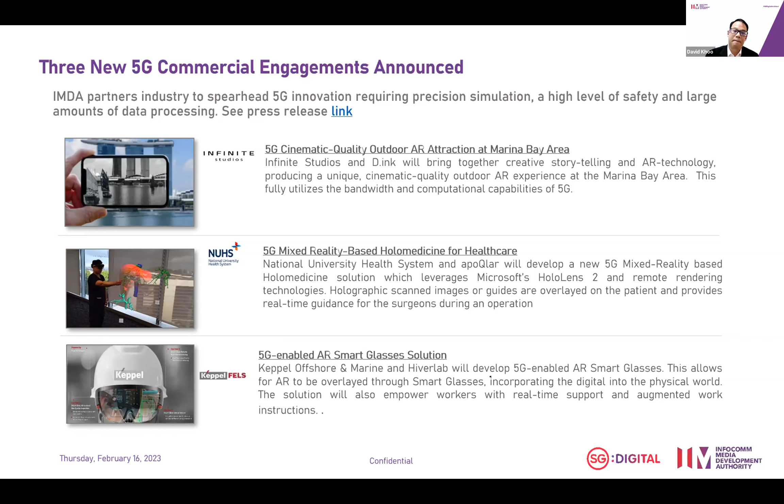So what is in it for manufacturing? As I mentioned, we've got several manufacturing engagements. It's just that it's not formally announced right now, so I'll have to refrain from mentioning who the companies are. But broadly, we see 5 different use cases within the manufacturing space which are looking at transforming how they do work.

My colleagues will talk about this later, but having collaborative robots relying on 5G, having your AMRs moving on the factory shop floor, we see that as a very common use case in the manufacturing space.

Second one, real-time monitoring, using cameras and obviously your IoT sensors as well, being able to provide true visibility for your manufacturing shop floor is also another key use case.

If you put those two together, collaborative robots and real-time monitoring, what's really changed in the manufacturing space is the fact that the shop floor now is completely dynamic. When I say that, I mean the shop floor isn't fixed to one station doing one thing. It can be repositioned or reconfigured dynamically to allow different products to be manufactured within that space.

And when you're looking at reconfiguring the shop floor, you can't have cables being pulled or laid for that purpose. 5G, being a wireless medium, provides them the flexibility of having that dynamic shop floor.

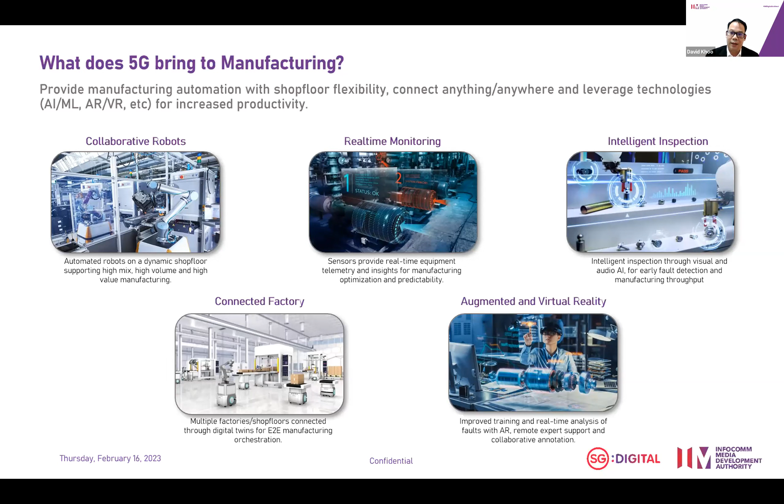As Terence mentioned, to get that ecosystem going, IMDA can't do this alone, and we actually work with several associations, several partners to make that happen. Obviously, webinars like this are very helpful to get the message out there and get awareness for us. But in addition to that, technical workshops are also critical.

So I mentioned we've got these open live test beds. One of those live test beds IMDA operates is what we call Pixel Labs, which is one of our AR VR labs. So if there are companies out there looking at trialing or understanding how 5G can transform their business, we would encourage them to make use of these open live test beds.

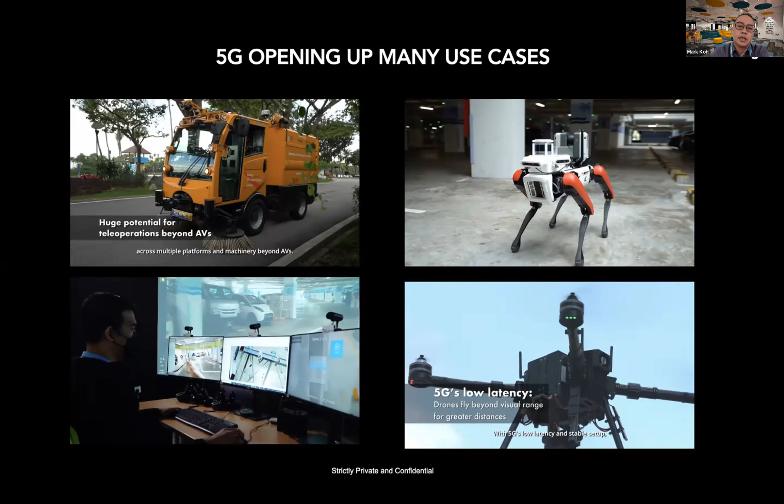Before I get there, I just want to quickly highlight that 5G has been talked about quite a bit. A lot of folks have seen the possibilities, whether it's some form of augmented reality use case, autonomous vehicles, AGVs, robotics, or even drones. This excites a lot of customers, but as we engage our customers, we see there are actually two major challenges that many of them face when they want to begin their 5G journey, which we can bucket into two big broad areas.

The first one is business case. I did see a couple of questions popping up about whether there's any real use case. One big thing that tends to come up is what's the return on investment for something like this? Why proceed with 5G? What can I do with 5G tends to be a very common topic, because a lot of times there are a lot of nuances.

People hear about the increased bandwidth, the reduced latency, the whole notion about SLA being enabled with this new concept called network slicing, edge computing. So in many cases, a lot of customers are trying to figure out how that fits in, how that benefits them, and whether it's sufficiently enticing to actually dive in and invest in this.

The other big area that tends to come up is how do I manage this? Doing a small trial is fantastic, where you build a full stack application like a drone, but how do I manage this at scale once I put this into production? How do I make sure it operates from an end-to-end perspective? That's also the other big question always looming in our customers' minds.

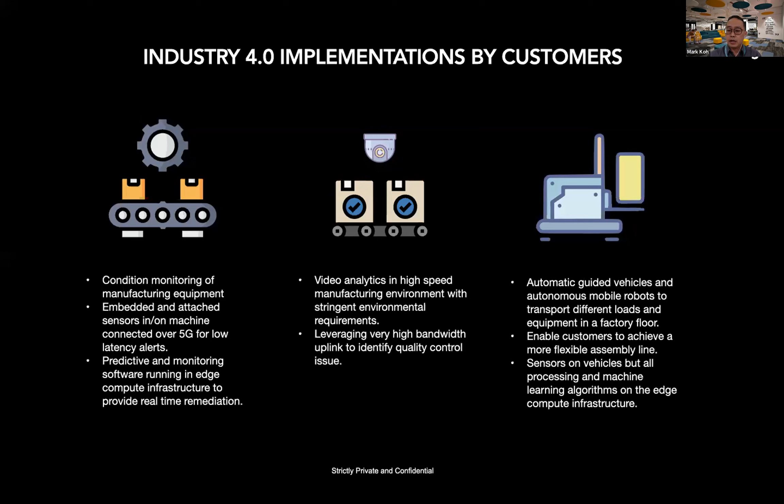Lastly, this is going to be my last slide. I'm just going to very quickly walk through three different use cases that our customers are actually looking at. These are in paid trials.

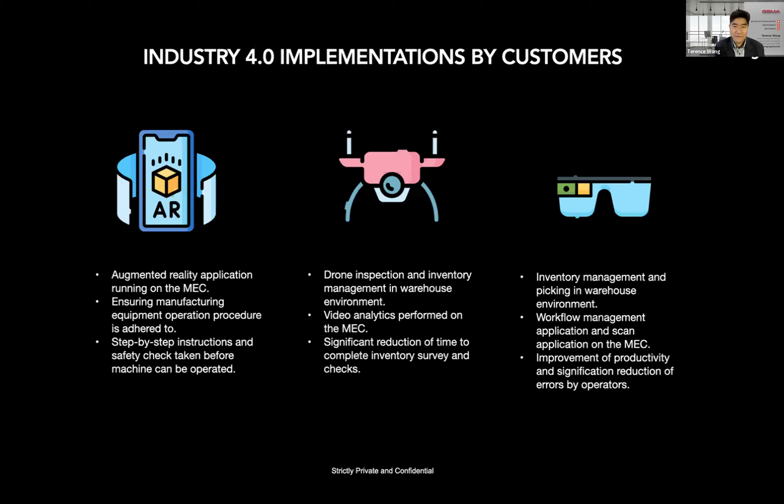Yes, thanks Mark. I think it's very good to see Singtel as an operator already transforming yourselves to bring new capability to support industry for digital transformation. I think it's really encouraging to all our operator members who are also looking at supporting this very good opportunity. So Mark, there are a few questions — please check the Q&A boxes. A lot of questions are already answered by David, but you can also take a look if you want to supplement any information. Of course there are also some questions directed to you.

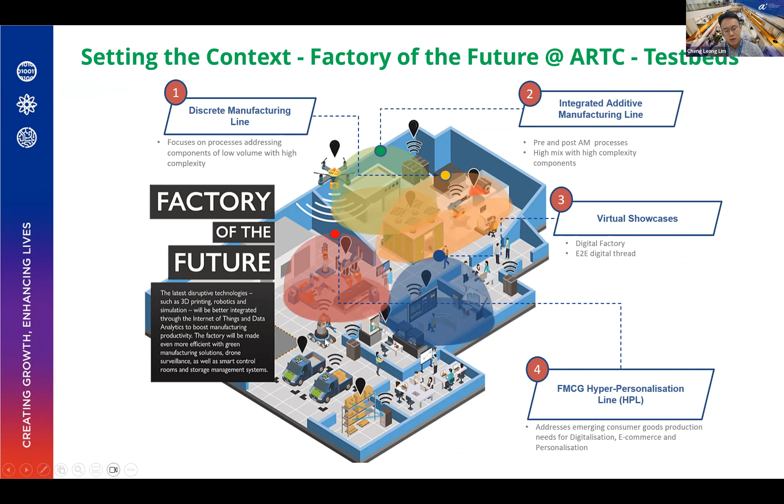And this is where we see connectivity becomes the foundation of the factory of the future. Connectivity must first support an information-centric network, meaning that the data being acquired can be distributed to gain meaningful production insights as well as control.

But how can connectivity today, as well as in the future, ensure seamlessness in the shift within these industrial processes? How can these building blocks be easily integratable, reconfigured, and redeployed within a factory line itself, overall at a much lower cost?

Practicing and realizing the promise of enhanced connectivity like 5G is really easier said than done. In ARTC, we have multiple 5G test beds, and we learned that 5G is really not a plug-and-play solution. There should be system design change and system reconfiguration to really take advantage of 5G, for example the choice of streaming protocols, or industrial applications in terms of camera settings. Having a dedicated space for industrial players to first trial, to gain implementation know-how as well as confidence in the technology, is very important.

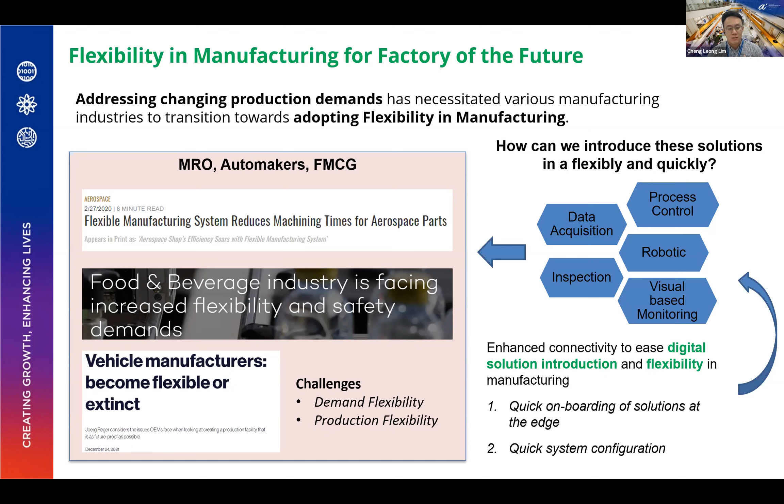So this is where the partnerships between telcos, research institutes like ARTC, and the industry can be most helpful to build a platform to realize the future and power connectivity.

As a research institute under A-STAR, which stands for Agency for Science, Technology and Research, ARTC is a contemporary platform that builds upon public-private partnerships with a mission to bridge the gap between research and industry. There are a lot of types of research, not all can be translated to industry, and yet industry needs R&D to sustain and be competitive. So our goal here is to co-create advanced manufacturing capabilities with the industry and eventually support deploying these solutions.

ARTC has just celebrated our 10-year anniversary last year. Now we have grown our membership size to 98 members today, companies of all sizes including MNCs, LLEs, and SMEs, coming from different sectors. We group the members into 3 main sectors: transport engineering, consumer and modern services, and energy.

In this consortium, it's very diverse. We bring together system integrators, solution providers, and public sector research organizations like the different RIs in A-STAR, as well as academic institutes like universities, all coming together to address industrial problem statements.

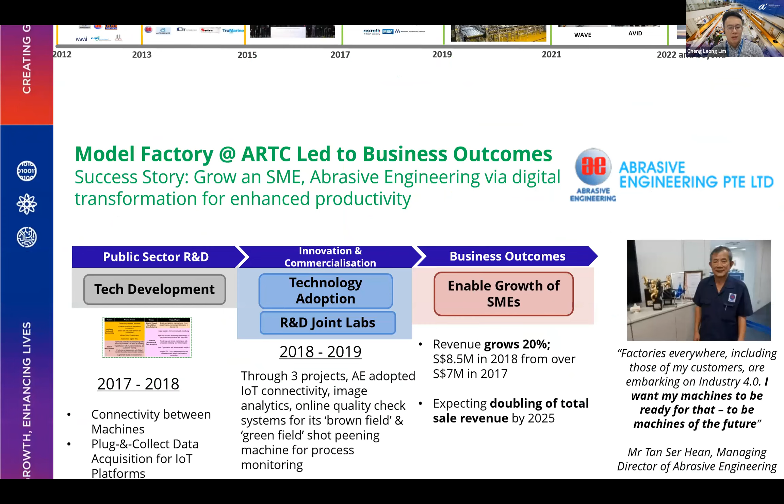With such a PPP framework, our research resources can be put together with best-in-class industrial knowledge, all in order to facilitate and accelerate early technology development and eventually deployment in the industry itself. One quick example of our PPP framework is our joint lab with Abrasive Engineering. They are a local SME.

They have been working with ARTC on their digitalization journey with the aim to transform their local factory with advanced manufacturing capabilities. Their goal is to design higher precision valves needed in aerospace, FMCG like dosing units, and so on. The challenge working with them is that in the factory, they have both brownfield and greenfield systems.

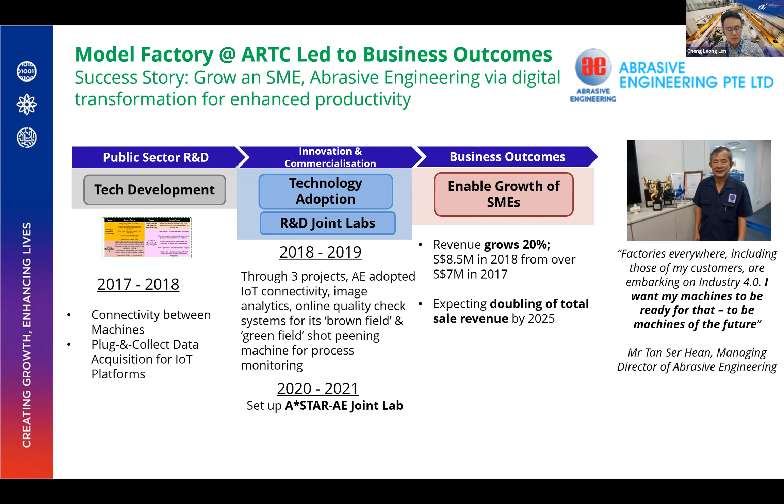In this joint lab, ARTC's expertise and facilities are leveraged to build ready-to-market capabilities like monitoring systems with IoT, image analytics, and predictive maintenance, all of which are integrable to their different machine types. It is such joint labs, such research programs, that help Abrasive Engineering reduce the time required for R&D, which they eventually adopted and actually deployed.

So now coming to the portion about my sharing on translating research to 5G application.

In ARTC, we have a 5G smart factory concept, powered by Singtel. It is a consolidation of multiple 5G enabled test beds spread out across ARTC, where 5G infrastructure is built on top of the flagship research test beds I mentioned earlier, like the model factory, hyper-personalization line, and supply chain. By building 5G infrastructure on these research test beds, we minimize the need to explore 5G use cases from scratch.

We are leveraging ongoing research programs with access to state-of-the-art equipment, and these programs are already working on problem statements tied to the industry. We believe that with our 5G smart factory and leveraging the research facilities, we can be one of the leading 5G manufacturing test beds in Singapore, focused on de-risking and defraying the costs associated with 5G industrial application conceptualization, and hopefully eventually adoption.

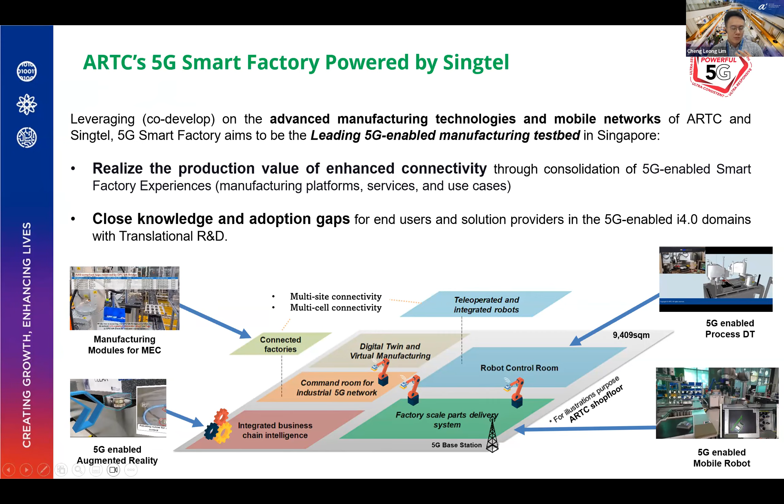Our intention is always that the drive for 5G should come from rethinking manufacturing. Simply plugging 5G CPE to machines is actually not sufficient. We need to deliberately design the use case to take advantage of enhanced connectivity.

Within our ecosystem, manufacturing players coming from different domains have different needs. The manufacturing verticals are very fragmented, every plant tends to do different things. To have better 5G relatability, we have to look into multiple 5G solutions rather than a one-size-fits-all model.

This is where in ARTC, we have seeded 5G topics through our existing collaboration platform, which we call core research projects. These projects are one-year durations that recur annually, tackling real problem statements grouped into common technology topics like advanced manufacturing processes, autonomous manufacturing, resilient value chain, and net zero manufacturing.

Having industrial players come together, sharing similar problem statements with common technology topics, actually enables cross learning between the companies. For example, in oil and gas, they have to look into net zero manufacturing, and these common problem statements can be related to medtech and semiconductors.

If we are able to introduce 5G into these common topics, the relatability of 5G and the need to address the connectivity challenge can be more compelling. The introduction of 5G to these topics can address unique connectivity needs within the topic itself.

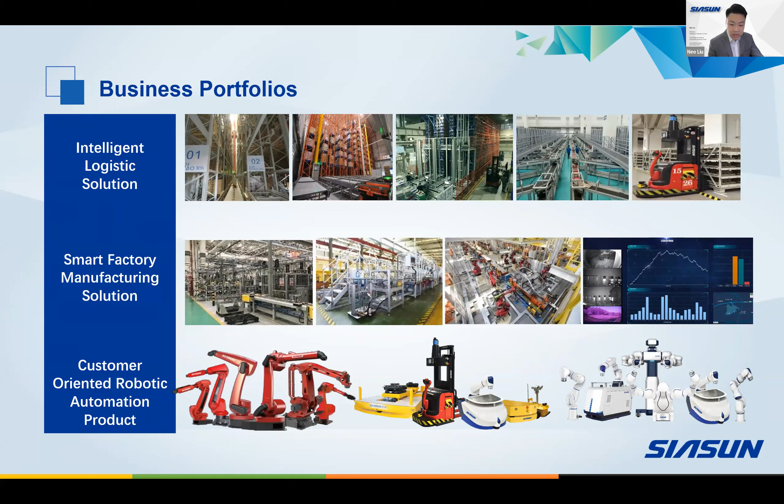Specifically talking about our solutions, we have three major segments. The first is intelligent logistics solutions, the second is smart factory manufacturing solutions, and the third part, which is one of the things our ecosystem partners and partners in other industries would like to tackle, is robotic products.

For SIASUN company, we actually have over 3,000 staff doing research and development of robotic automation applications and technology research, with R&D people making up about 75%. So we have accumulated over 35 years of this kind of research and engineering application know-how.

As we know, China is maybe one of the largest manufacturing countries in the world and has the largest and most complete supply chain. So we have opportunities to provide solutions crossing different industries, and this is how we established this team as one of the largest robot companies in China.

Just to have a quick look at our partners, mostly we have eco partners and supply chains which are world famous suppliers. I also noticed in the previous speakers that we can see a lot of corporations.

One thing I would like to highlight is that our cooperation is based on long years of commercial projects, corporations that provide end-to-end industrial automation projects, such as production lines or assembly lines, and even automated robotic products such as AGVs.

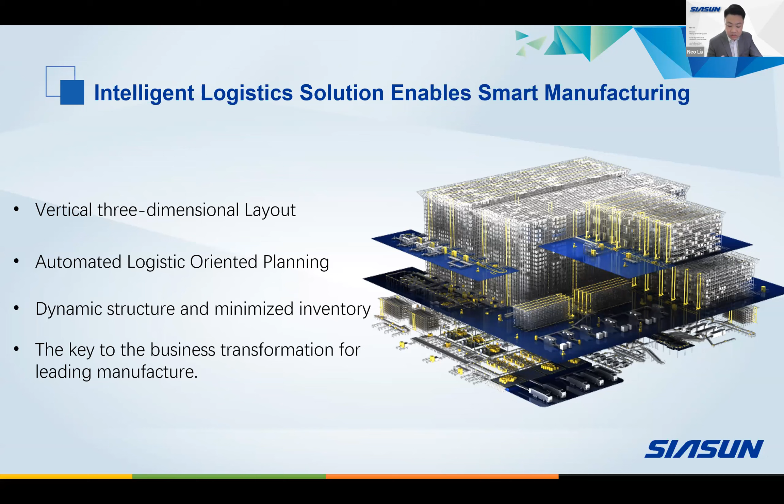So we provide the infrastructure of the entire system, from IT systems to physical automation devices. This is not just providing a single solution or use case, but more like a tailored design after a series of consultations and surveys, which is unique to every individual customer.

It can be from DC centers, fulfillment centers, e-commerce, even some warehouses of manufacturers, or other industries. However, the purpose and the process will be totally different, and the requirements for each customer are unique.

So when we provide solutions, we have to understand the pain points of the customer, what is the ROI, and the main concerns of the customers. We don't select specific solutions to promote, but integrate based on the requirements of the customer. This is the essential point for establishing trust and long-term cooperation with the customer.

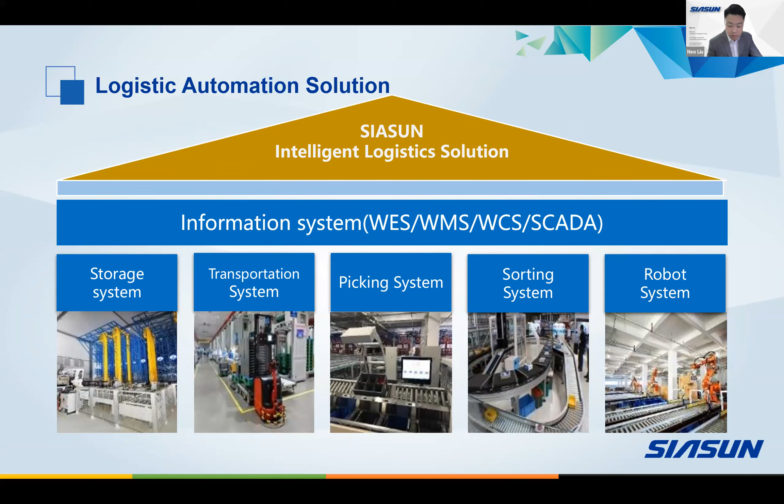For example, this is one of the use cases we have in China, where we strategically worked with the BMW China factory. Since about five years ago, we have been testing this.

About three years ago, we started testing 5G applications in China together with BMW. At that time, we were installing 5G CPE modules on our AGV systems, and all these robots, as you can see, are running on the 5G network in the factory.

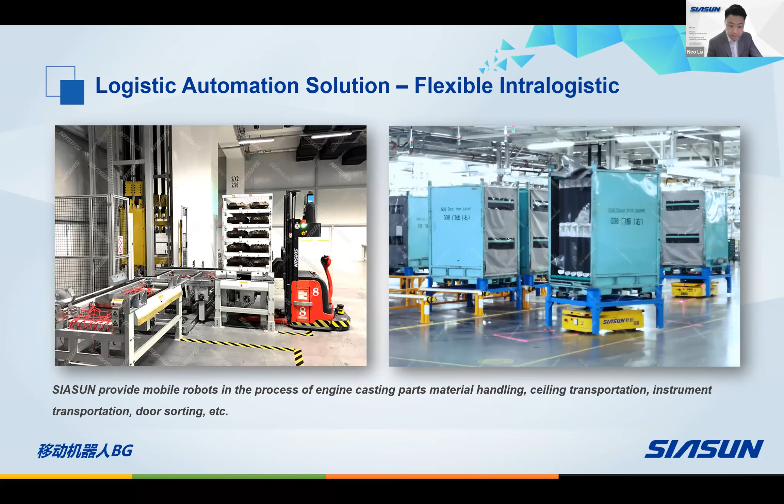Most importantly, the investment is very flexible. The customer can predict sales values and amounts and increase investment every year based on production capacity and market feedback. Together with 5G, we're able to scale the systems much more easily. Our engineers are sometimes able to access the whole system and monitor operations from our headquarters office, with no need to be on site. Everything is not possible without these new technologies.

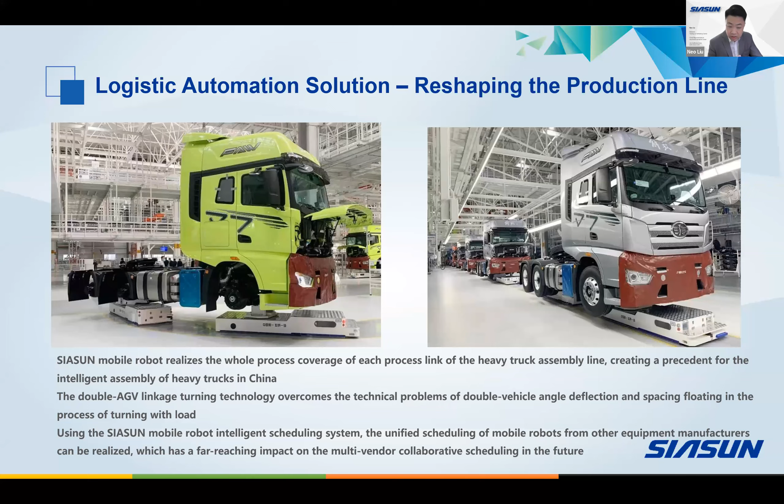We've already established a very big, first reference for Chinese suppliers outside China in Singapore, and hopefully also in the near future in Thailand.

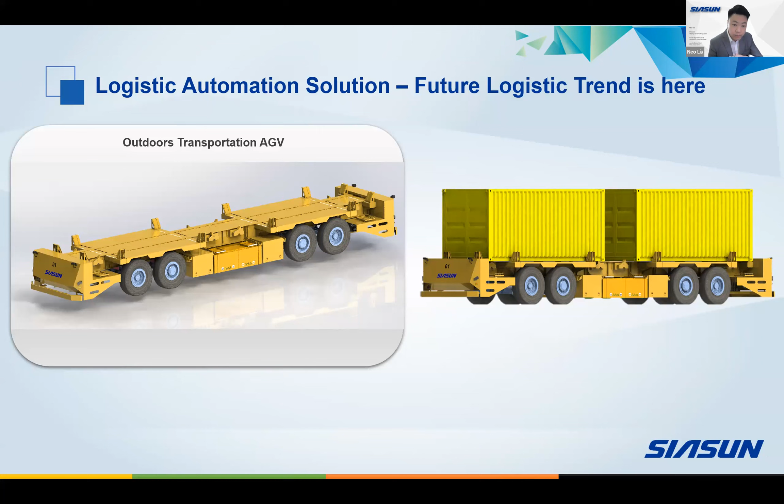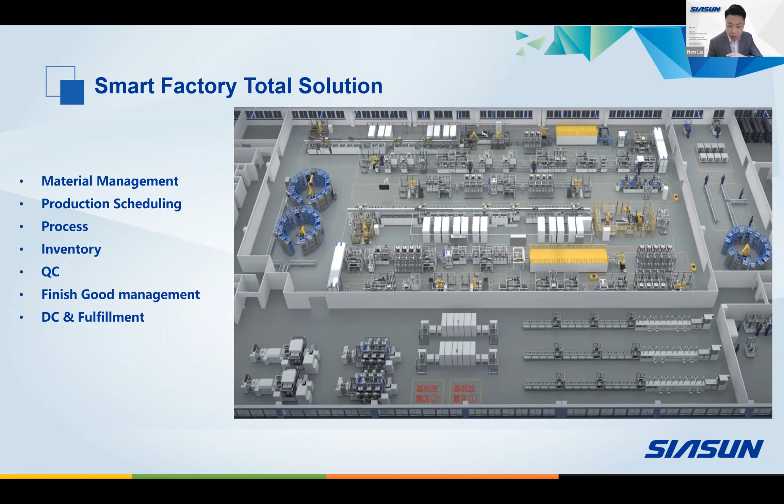This is a perfect ground for any new technology to blend in and be shown. I'm currently based in Thailand, and the common feature for Thai customers is they would like to see the real case, not just reference cases in the labs. Those are good for setting models, but for ROI, feasibility, and industrial applications, customers like to see real case references. This way they can evaluate risk and feasibility from both the technology side and the productivity side. This is also the biggest strength of our company: to provide such commercializable turnkey total solutions.

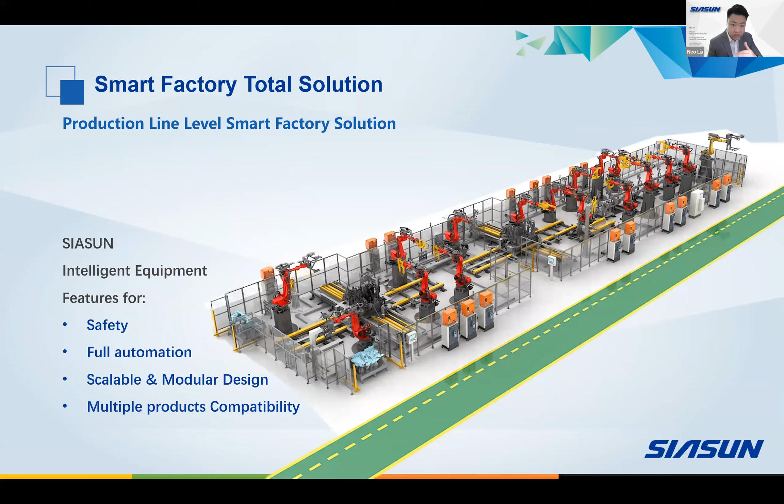These are the things most customers look at when we consider building different levels of factories, for example factory levels or production line levels. We look at all the features merged together, which is the major concern for customers. Next, I would like to show one of the real case projects we delivered in Thailand.

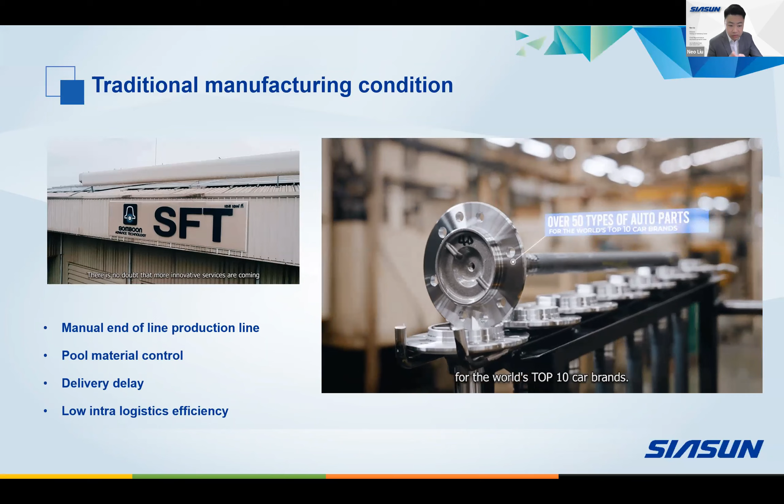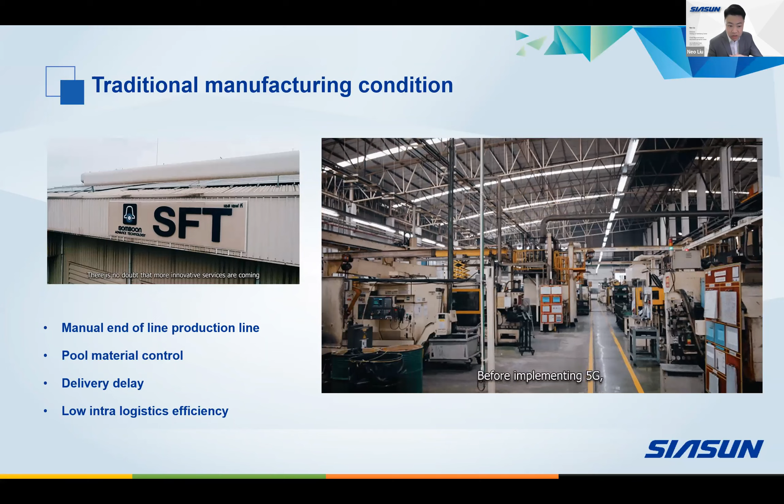This customer is one of the leading auto parts manufacturers in Thailand, with over 60 years of history. They are a traditional industry, and like all traditional industries, they face challenges and are looking for transformation opportunities. These are the problems they were facing in their factory.

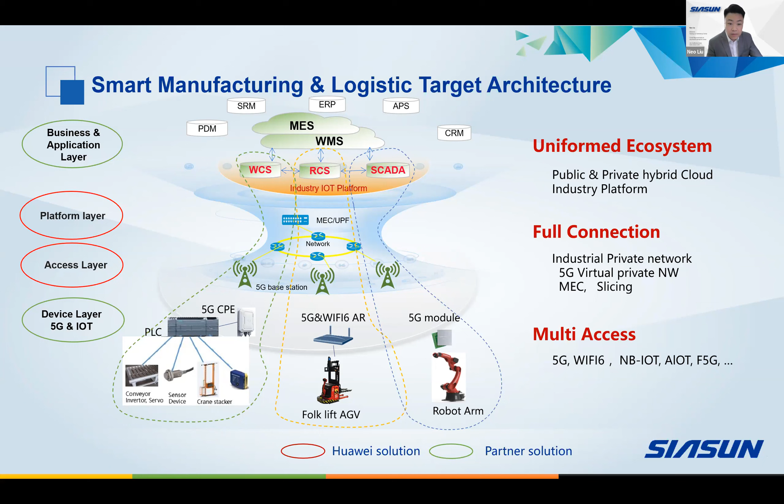Let's take a look at the structure. As you can see here, we have different layers of the systems. For SIASUN, we provide the layers from the device to the control to the execution scheduling. This part is what all kinds of customers will be looking for. Based on this, we can seamlessly integrate with the customer's existing systems, also using new technologies such as IoT, 3D vision, 5G, and digital twins to facilitate the factory manufacturing process, and also to create the concept of Industry 4.0 or sustainability development.

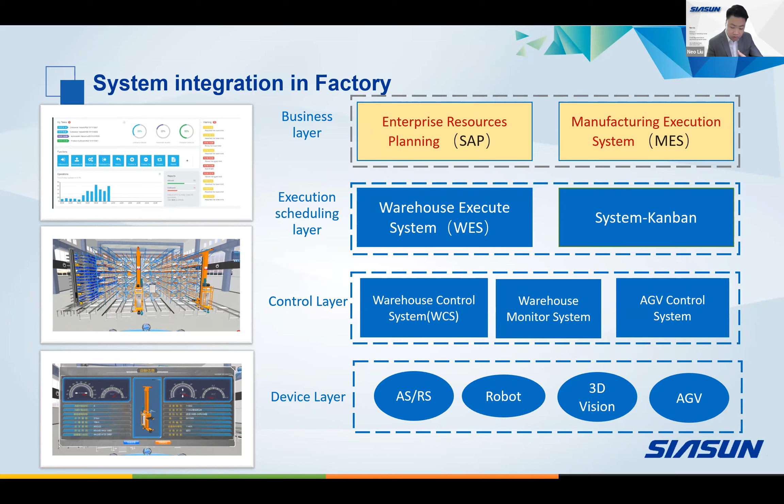Let's take a look at the actual case for our projects. The first part is the intelligent 3D vision camera systems with robots auto grabbing.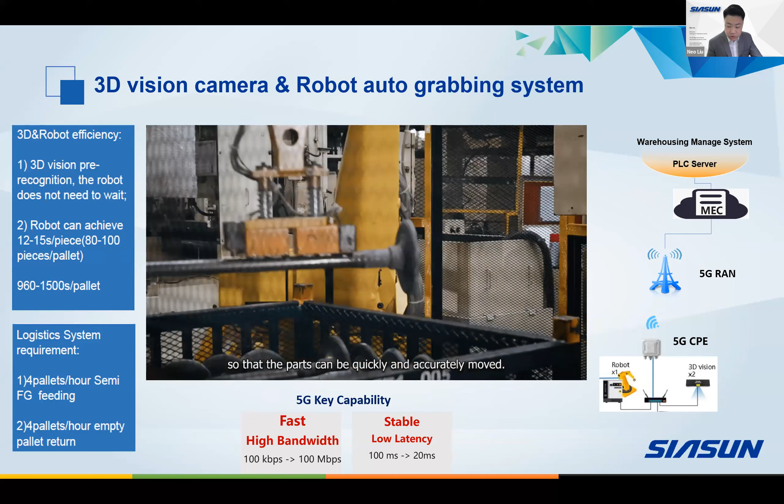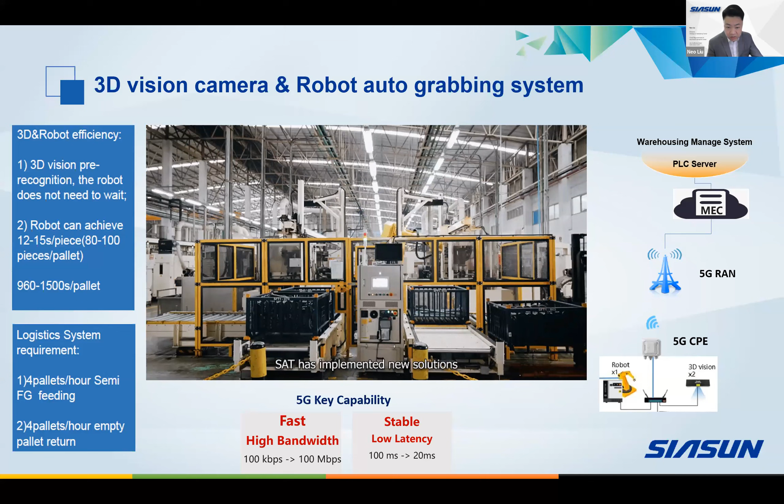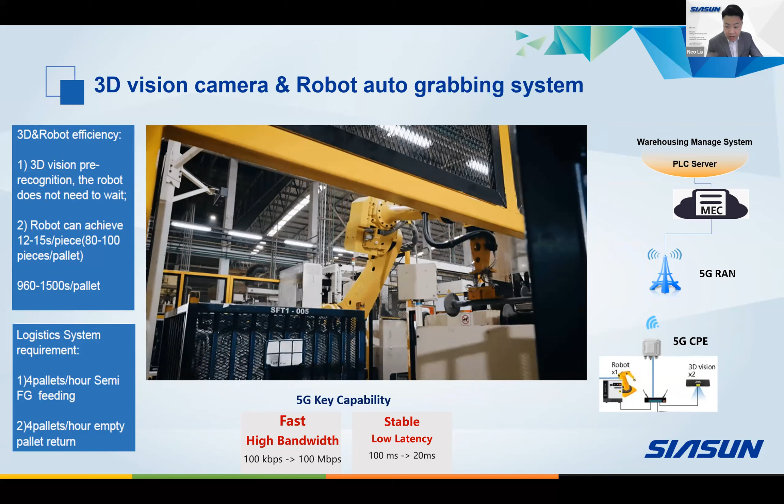For these projects we use 5G to control the robots and the vision system, utilizing high bandwidth and low latency. This keeps the reliability of the system, and we also utilize the high bandwidth to scan and collect all the visual data to be analyzed by the servers. This is a very good application because the robot system itself is quite remote from the main server, and the distance deployed in this old factory is very limited. There are no ducts or bridges allowing us to install new wiring cables or internet, so we had to find a new way to seamlessly upgrade. 5G is actually one of the best solutions for this case.

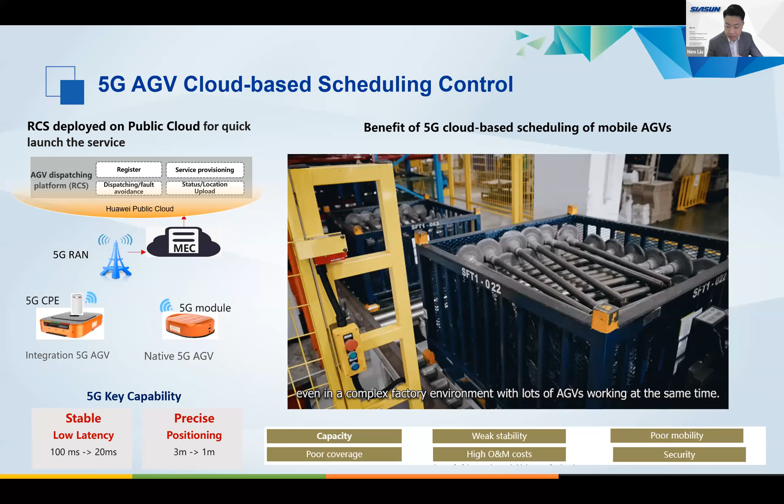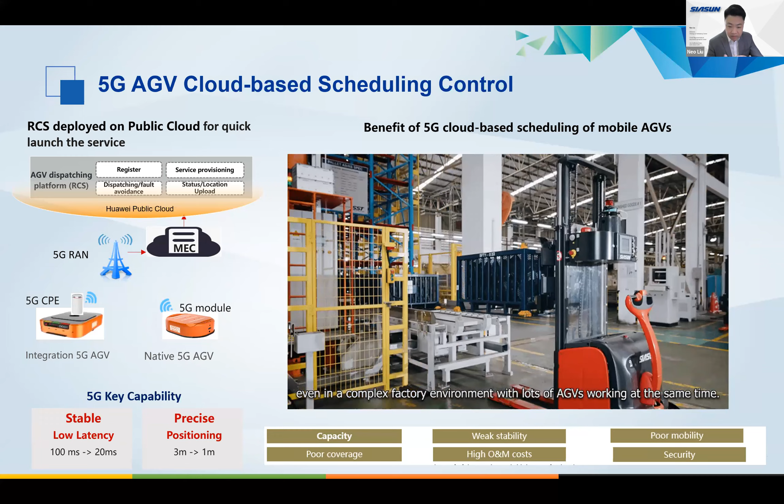The second part is the flexible transportation, which is the AGV. Right now this is one of the most suitable projects and solutions for many users across the region. Every customer has their own factory and warehouse, and also their people. Typical customers have 3 shifts for 24 hour operation. Using the AGVs, we can also use the 5G monitoring system on the cloud. This enables very seamless connectivity, and also enables the factory to run at a very low cost with high reliability using 5G.

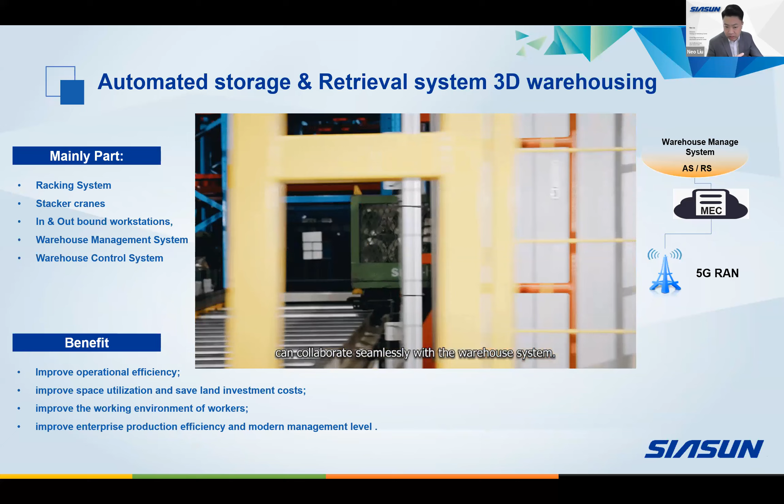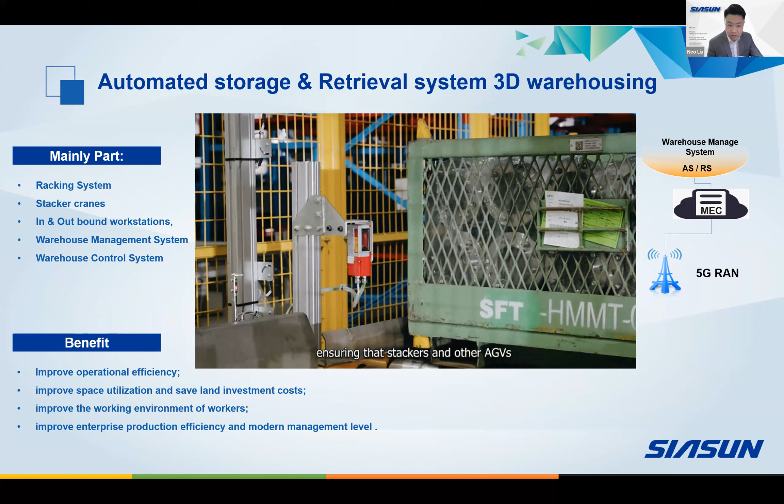The third part of our system, also one of the key parts, is the AS/RS system, the automatic storage and retrieval system. It's no longer only a warehouse, it's also the core, the heart of the factory. In this warehouse are stored the raw materials, semi-products, and even finished goods, highly flexible and monitored by smart software systems. With 5G connected to the MEC, and through the MEC to the 5G RAN, we can organically connect all our automation devices together to form a total factory solution using 5G to connect everything.

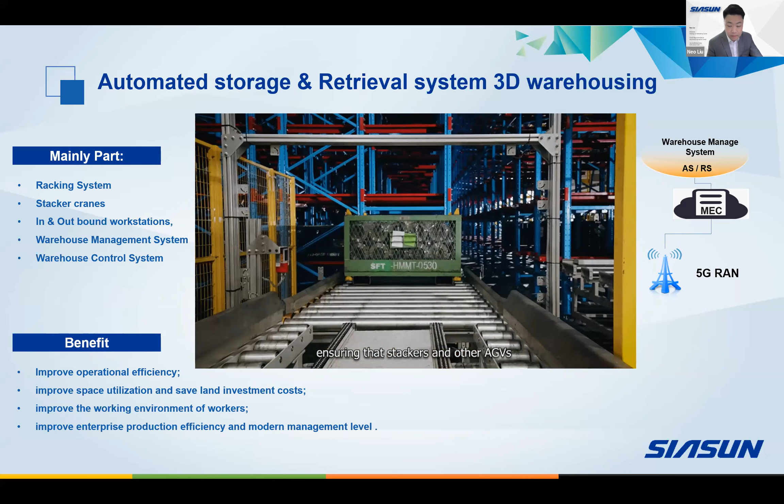So this is the network infrastructure solution. As you can see, the devices used in this warehouse are actually not so many. It mainly is one set of the AS/RS warehouse control, 2 AGVs, and 1 robot, along with some PDA and menu devices allowing the operators to monitor and see. But the meaning of such an application, using the limited resources of 5G devices or SIM cards, is very significant.

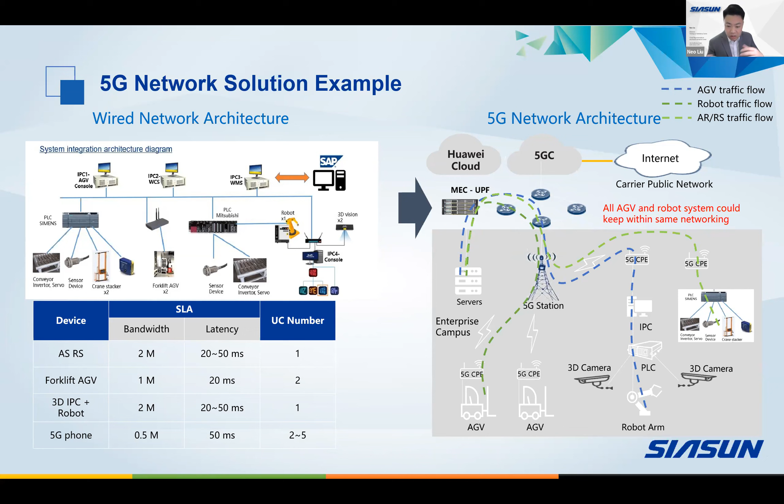This is actually the first time for the customer to use and experience such technology. As we know, manufacturers don't have only one factory. Once this door is open, they will seek opportunities to apply such technologies to other projects, at a larger scale, but with commercial value.

So this is actually the structure. It's also empowered by Huawei and AIS. It is not possible without the network provided from the AIS.

Our aim is to expand this POC, or pilot commercial project, to the enterprise level, and also set it as a pilot and reference for the region, allowing other customers in the same region to see what the vision of the 5G smart factory will look like. This kind of technology is not new—we just set a correct business model, find the suitable customers with the suitable technology, and integrate. This is the most important point: how to show customers what the future looks like. So this is our vision of what the future would look like.

As SIASUN Group, we see in the industry developments and manufacturing transformations that in the near future, in the manufacturing industry, there are several areas where we see more opportunities for applying 5G smart manufacturing, such as the EV battery manufacturing process.

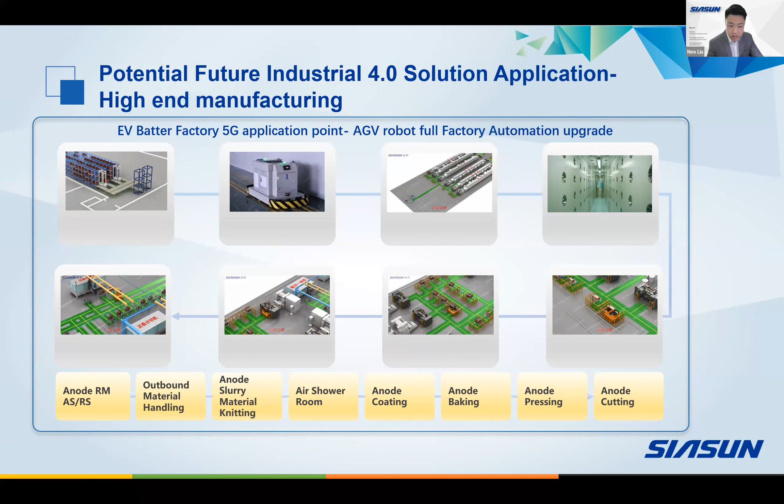Another area is high-end electronic manufacturing, as we see a rising trend in the China semiconductor and electronics industries, and also through regions such as Vietnam, Thailand, and Indonesia. In this part of the solution, we like to see applications of cutting-edge technologies such as what we call ARV robots.

This is the AGV with robot cobot arms developed from SIASUN. As you can see, the robot AGV is no longer considered just a transportation device, but part of the production line or production equipment. So it's very important to monitor its status and link seamlessly between different devices as the production lines upgrade. We can see 5G will also play a very important role in dark light workshops or digital twins, applying different technologies that utilize high bandwidth, especially the low latency features that will be deployed in the near future.

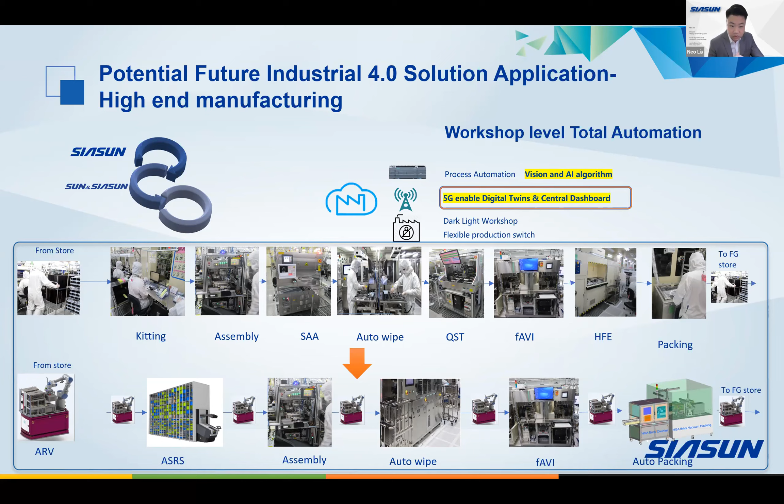Okay, thank you so much. And this is the one I'd like to share with you.

Thanks, Neo. I think it's great to see SIASUN embracing 5G technology. I see a lot of cases for greenfield, like EV production, and also existing warehouse or logistics inside a factory. So if there's a chance, we'd definitely love to bring the community to visit some of the factories in Thailand, China, or Singapore that you mentioned. Thanks again.

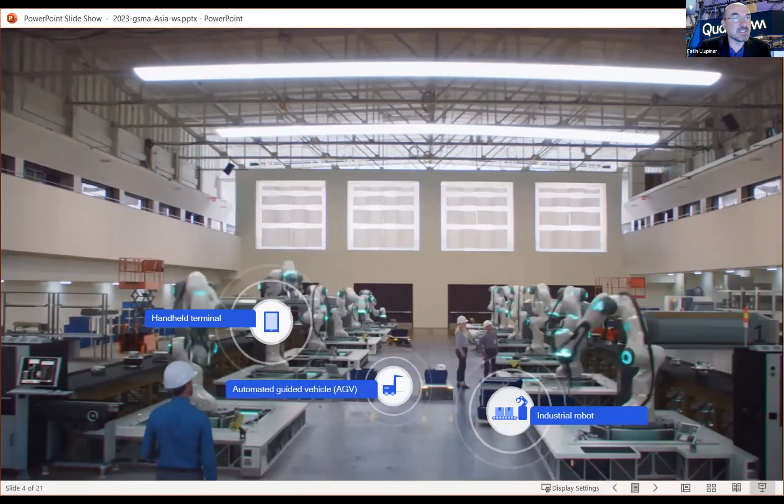5G release 15 and release 16 particularly are designed to address many different use cases, from manufacturing facilities to big warehouses, hospitality, stadiums, hospitals, airports. Specifically in the industrial domain and factories, three main features of 5G, starting with eMBB, the broadband aspect, URLLC for reliable communication, and massive IoT, come together to address many different use cases, from robotics to AGVs to XR, AR, VR headsets, cameras and sensors, and many others.

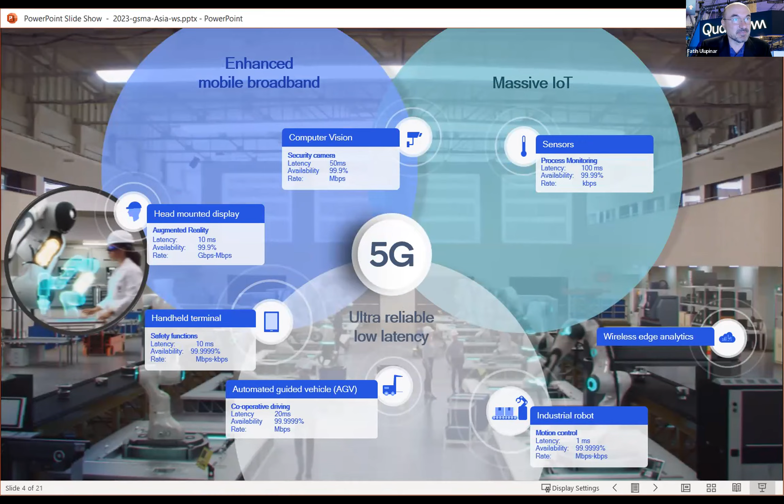5G, especially in release 16, has specific features: a private 5G network, which enables 5G to be deployed independent of larger operators, Ethernet and time-sensitive networking, and ultra-reliable communication. Sidelink is also introduced in 5G, but I haven't seen that being used much. Other features are much more important at the moment.

Another non-communication aspect of 5G is precise positioning. With this, not only is communication provided to the devices, but the device's location can be tracked by the system, allowing for better guidance and other facilities. Also, 5G allows for deployment in a variety of spectrums.

5G private networks, an essential aspect of 5G to be able to operate in enterprise or industrial environments, bring the operator class 5G down to the size of an enterprise or factory. It brings all the security features that operators rely on and all the optimizations that 5G uses for communication, allowing it to be deployed as a dedicated network on a premise.

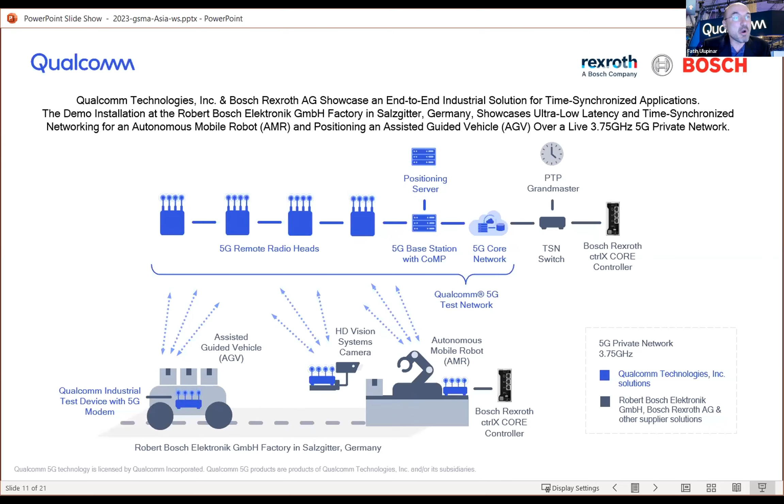And there are different kinds of devices in this trial. One of them is an AMR, a robot that picks the pieces and shows it to a camera. And then there's an AGV that's under the 5G system. This particular use case is looking at multiple applications running in parallel, all going through the 5G system.

And the camera itself is using high-speed data. Of course, it needs to take very high-resolution images and send it to the controller. At the same time, robot is using a TSN communication where the data is time-sensitive, and also there is a high-precision timing provided to the robot. We were able to achieve 1 microsecond time synchronization with the robot and the controller in the back office.

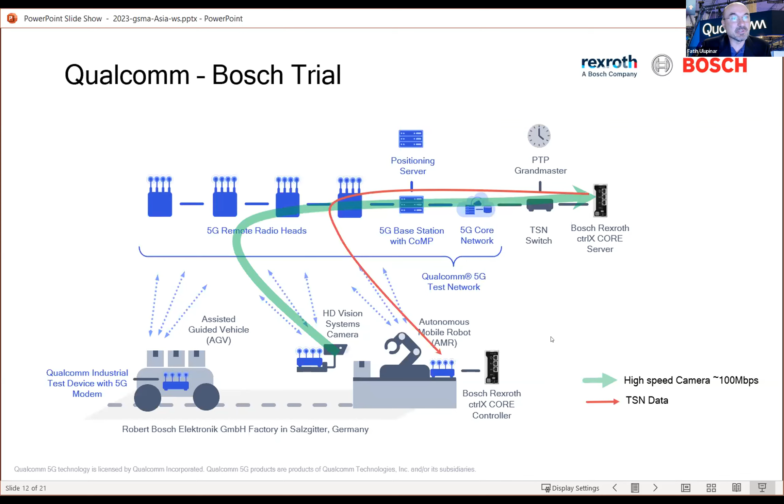The video, let me start and I'll be talking over that. So this is a facility in Germany, Salzgitter factory, where they produce some automotive parts. And that's where we did the trial.

Again, on the top, so that's what happens. The robot picks up an object and then tells the controller, I'm ready. Then the controller instructs the camera to take the picture. Camera takes a picture and sends it to the controller. Then controller decides if it's a well-manufactured part or there are some defects in it. If there's a defect in it, it will be put into the fail bin. If it's good enough, then it will be put into the pass bin. When the pass bin is filled, then the AGV moves away from here.

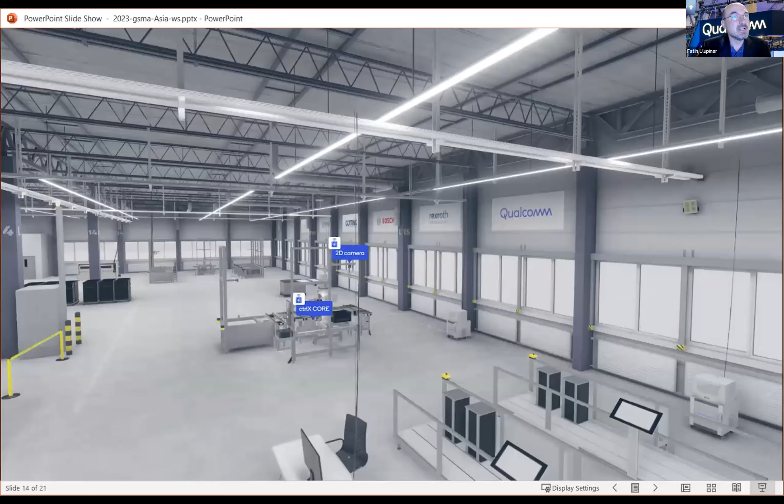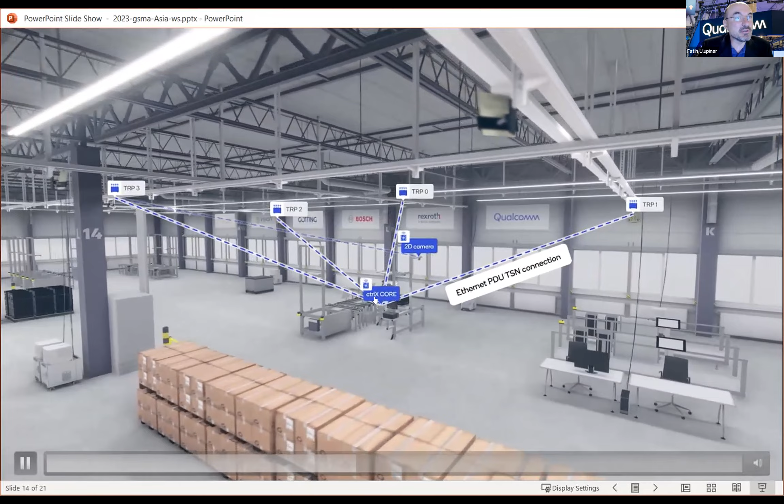So, this is a 3D rendering of what's really happening. We have used the Ethernet PDU for all this communication. The robot itself uses TSN communication, and it talks to multiple TRPs. That's what it was showing.

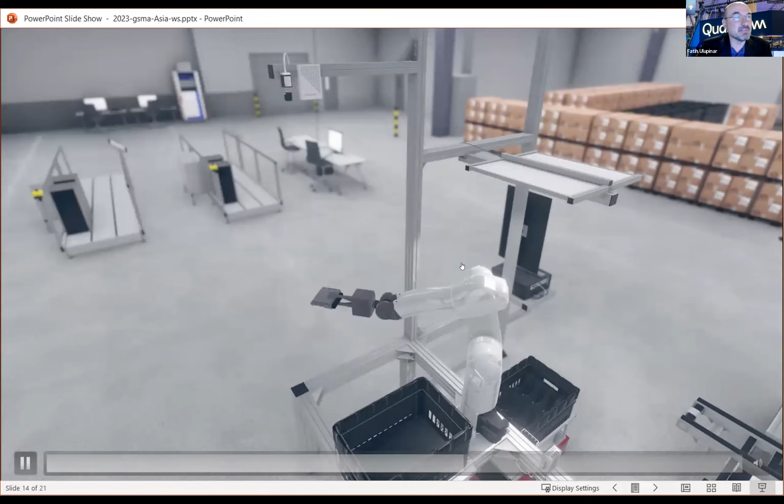So let's see, we'll be seeing the same thing in action right now. On the top right is the actual footage of the trial. On the bottom, on the large screen, it is the rendering of the operation. So this is the camera taking the picture and the 5G device sending it over 5G to the server.

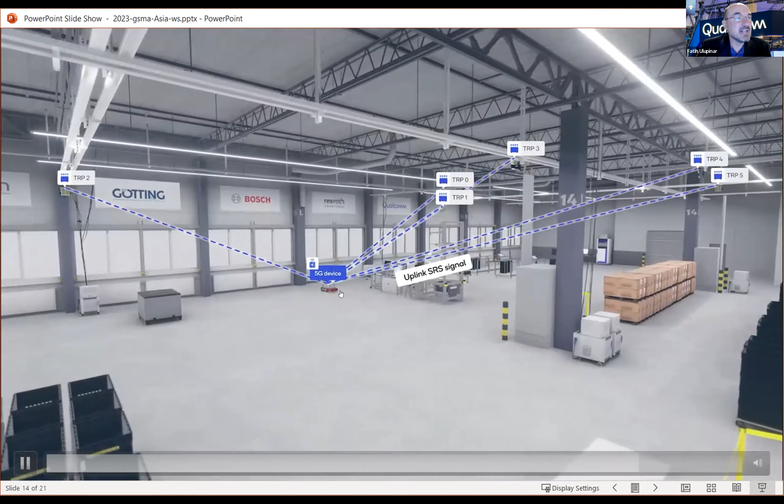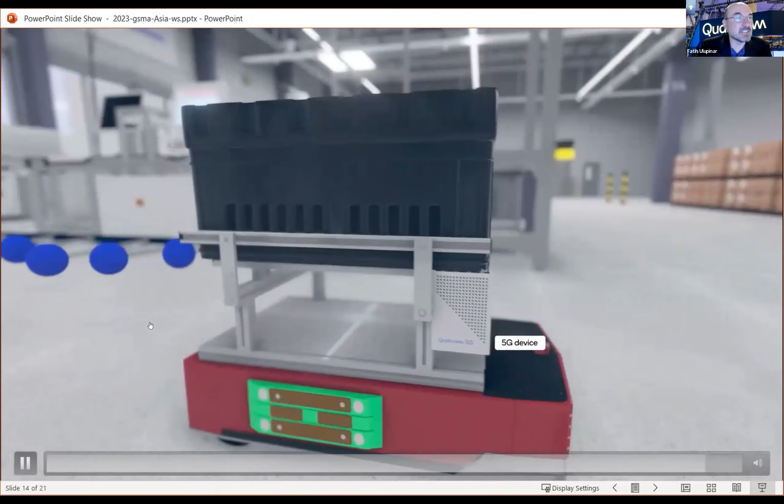The other aspect of the trial is this AGV. In the case of AGV, we only looked at the positioning aspect of 5G. And the AGV itself has ground truth data from the tape on the floor, and it reports its ground truth data. At the same time, 5G locations are calculated. It shows the AGV is moving along. And the calculated 5G location is put as blue dots in here, as you can see. Then we can see how well the calculated 5G location corresponds to the true location of the AGV.

Okay, this is finished.

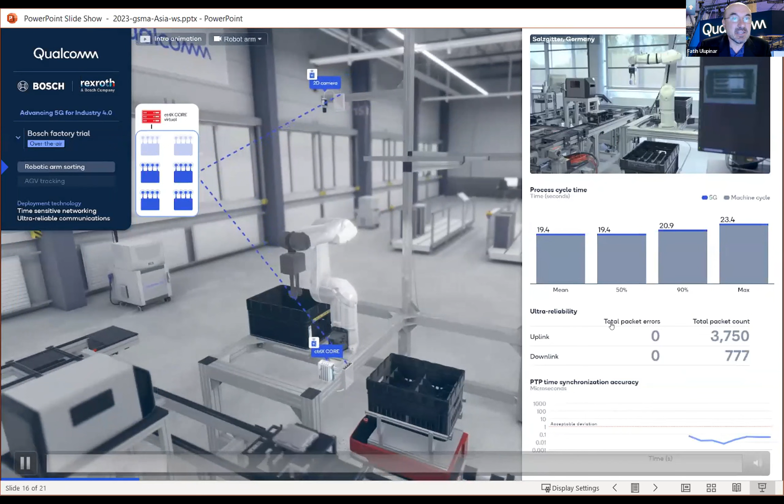In this screen, we'll be showing the performance data of the operation as the devices are moving around. We're collecting some statistics. Over here, the numbers are showing how many packets went through the system and how many of them were in error. We essentially were able to achieve, in this particular case, very low packet error rate, very close to zero, as demanded by automation applications in industrial settings.

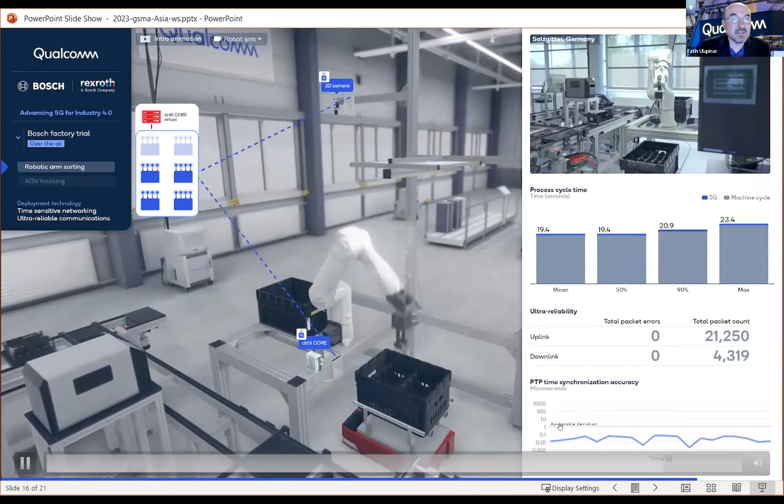The graph at the bottom is showing how much time synchronization we were able to achieve. As you can see, the middle line is 1 microsecond, and we were able to achieve timing errors less than 1 microsecond as required by the automation applications. The bar graphs here are showing what was the cycle time, that is, how long does it take for one part to be inspected in this setup. And the blue part of each graph is how much 5G took in that process. So it was essentially a minuscule part of all of the time that's taken by the whole inspection process.

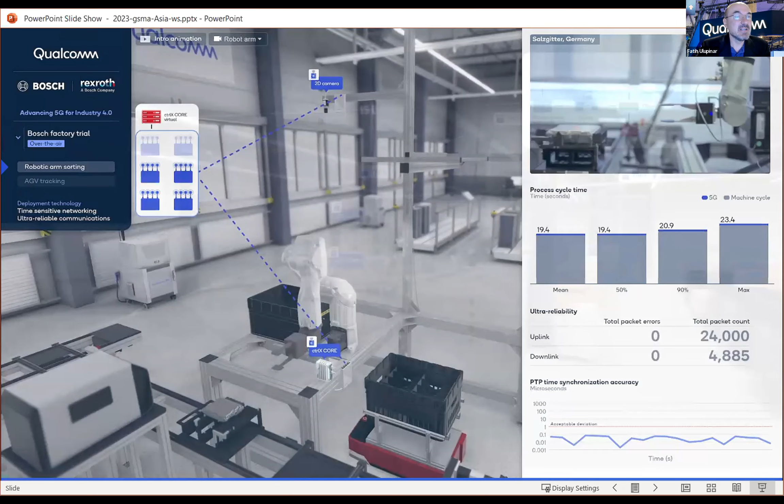And this is the positioning aspect. Let me see.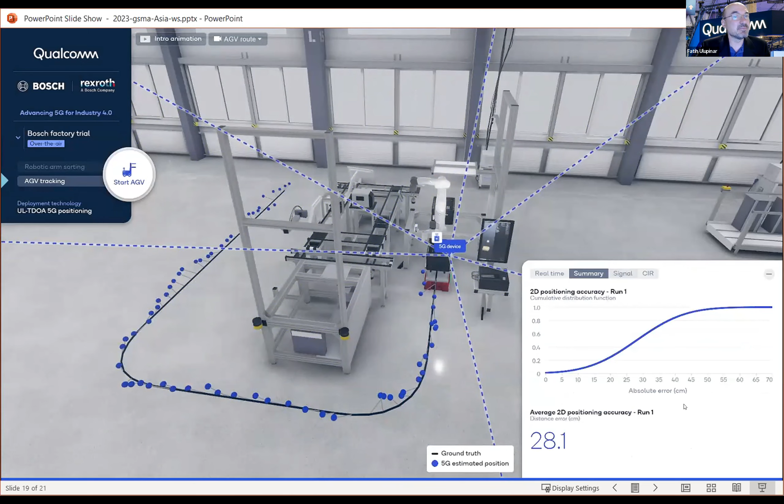Essentially, we were able to showcase in this trial that 5G is capable of doing TSN traffic with time synchronization less than 1 microsecond error, and it can provide 6 nines of reliability. In addition to the communication, we were able to provide positioning of the devices, which all of these together can address many mission critical use cases.

Thank you. Thank you, Fatih. I think it's a very promising figure that you shared with us. So really looking forward to how this could be applied in a real factory scenario next.

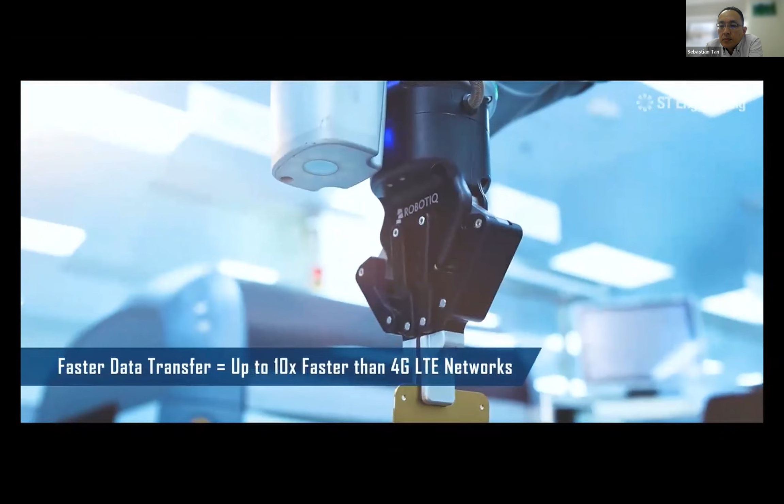We believe that 5G-enabled factories of the future will deploy autonomous robotics, video analytics, and intelligent sensors to optimize and orchestrate every activity on the manufacturing floor. As we drive towards Industry 4.0, we are excited to deploy new 5G-enabled capabilities in our own manufacturing centers, so we can experience firsthand the challenges, value, and impact of 5G in the arena of manufacturing.

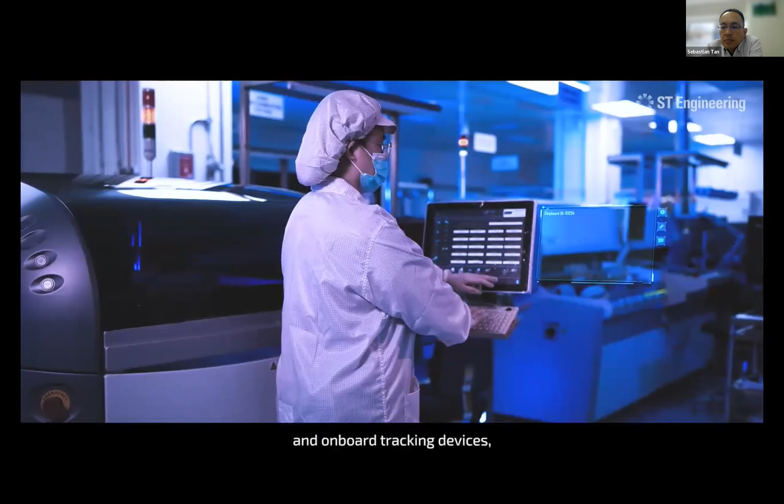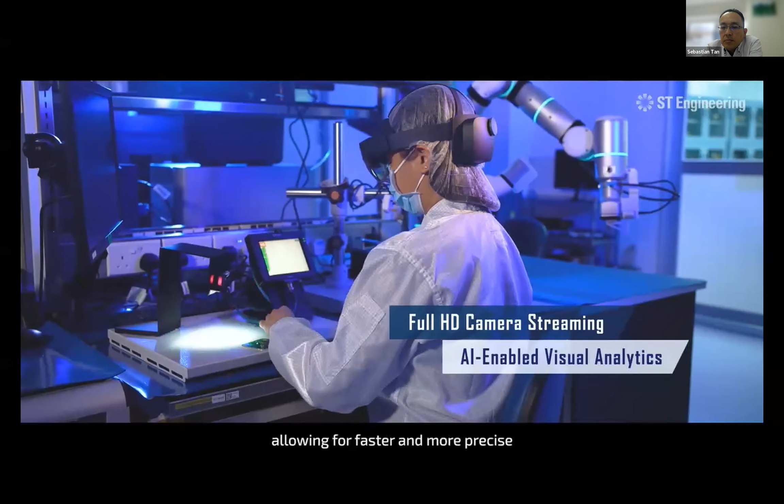By deploying a range of sensors, including video cameras, environmental sensors, and onboard tracking devices, we get a deeper understanding of what is happening across the board, tracking and predicting the health statuses of our equipment and environment. Implementing high-definition network cameras allows for faster and more precise AI-enabled inspections whilst reducing the margin of error.

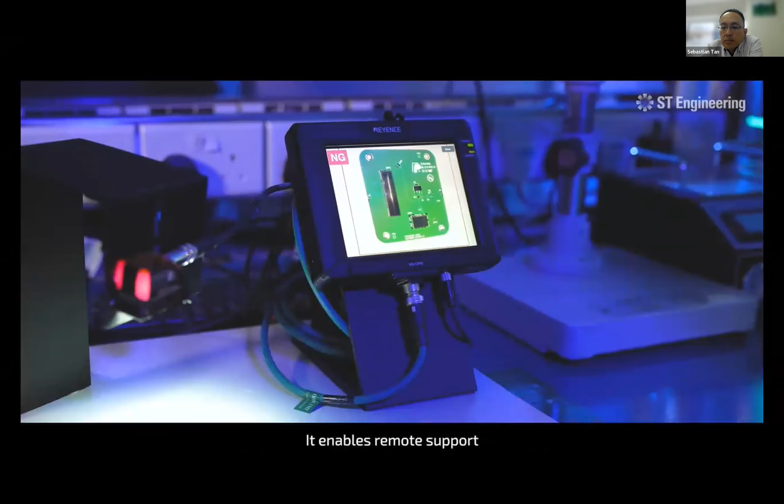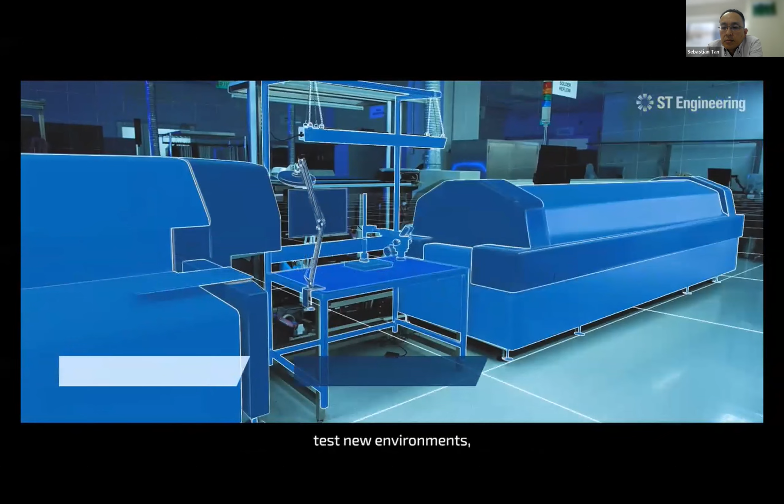5G also allows us to better leverage AR and VR tools, increasing productivity and changing the way we work. It enables remote support and even collaboration across factories and countries. Beyond this, we have wider ambitions. A digital twin of our operations would allow us to plan for new scenarios, test new environments, and change operations on the fly, all without having to stop production or make physical changes on the ground.

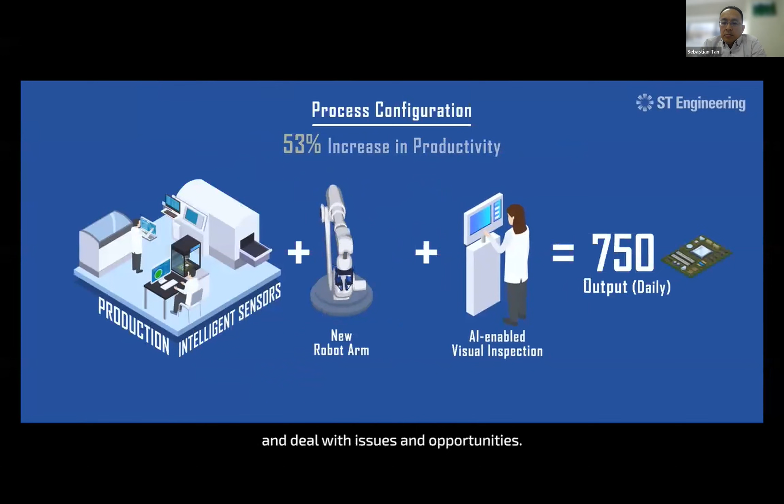It would strengthen productivity, support more agile process configuration, and change the way we anticipate and deal with issues and opportunities. At ST Engineering, we are co-developing new capabilities with world-class technology partners and developing exciting new solutions that can readily be applied in the manufacturing sector and far beyond. We believe that 5G technology creates endless possibilities for industries, organizations, and our partners as we transform manufacturing environments and the way we build the world.

So I think I'll just give a quick answer to what we are trying to do with 5G. The video shows live footage of our factories, with presence across multiple sites within Singapore as well as overseas. Our vision is to connect all our factories together to build a centralized factory operation system, aggregating our MES, robotic systems, QC and QA functions all into one, so we can uplift our manufacturing staff, embrace new technology, attract younger talent, and perform R&D faster. With that, we aspire to grow our manufacturing business and capabilities using 5G, robotics, and artificial intelligence.